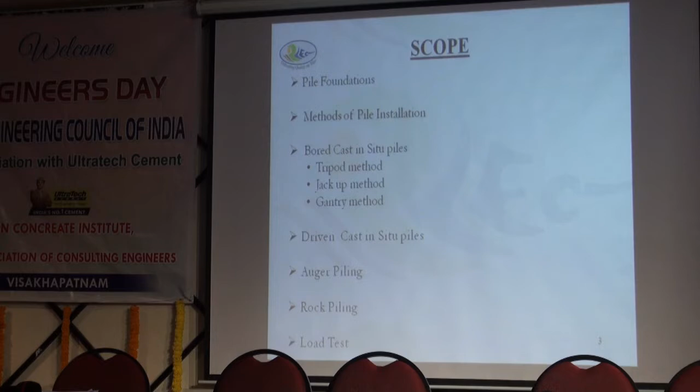So we have to test whether this pile foundation, whatever has been given for the load, it is taking the load or not. These piles are to be tested. In early days, up to 2005, we used to test piles only up to 500 tons, but today we are testing piles up to 4000 to 5000 tons on each pile. So the technology has also gone much ahead, and there are scientific methods of doing this. So I'll quickly go through the pile foundations, whatever are there, the testing whatever has been done, and then I'll explain two projects which are very critical and how we executed those two projects.

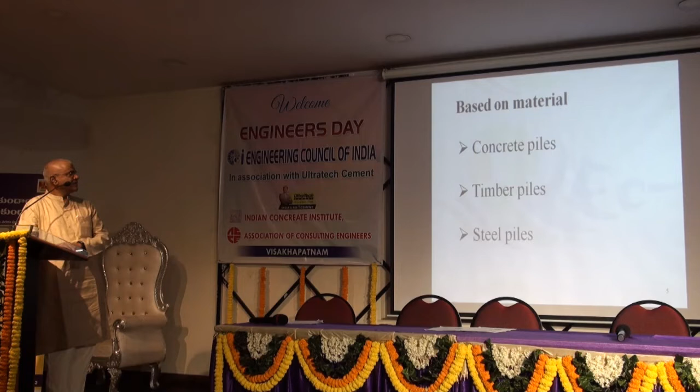We'll give you a presentation on that. The first classification is based on installation method: cast in situ, bored cast in situ, driven cast in situ piles, then driven precast piles, bored precast piles. Based on the materials, we have concrete piles, timber piles, steel piles. Of course, now timber piles have gone out because of environmental issues. Mostly left out are concrete piles and steel piles.

Bored cast in situ piles - these are the activities that are generally done in bored cast in situ piles. First, being a marine structure, we have got to do the piles in the sea. So a liner with MS plate is required, which is done in the first stage. The driving of the liner is done up to the hard layer.

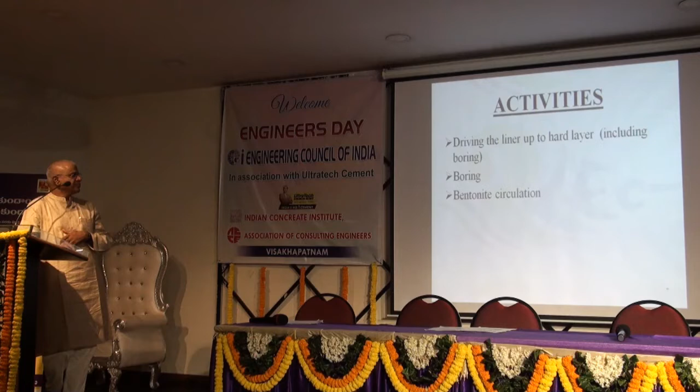The boring is done with different methods, which we will explain. To retain the soil around the pile foundation during boring, we use a bentonite solution which holds the soil and prevents it from collapsing. Then comes reinforcement cage lowering, Tremie concreting, and load testing. These are the activities generally taken up in these works.

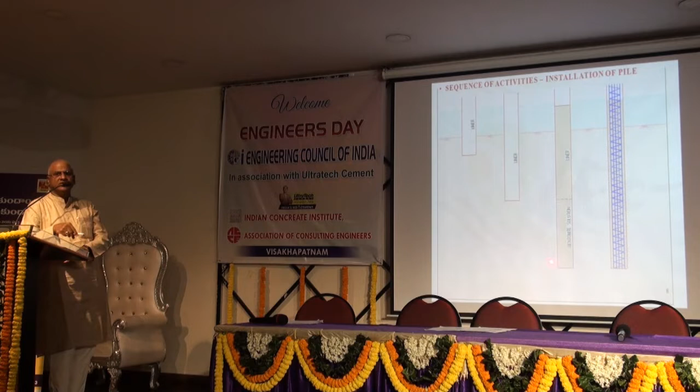The first thing you see is the liner, an MS sheet liner which is driven up to the hard strata. You keep boring and drive the liner till the bottom. The liner is taken up to the hard layer wherever it reaches a refusal point, and from there you continue boring till the foundation level as per the design. Once this is over, you lower the reinforcement cage into the bore.

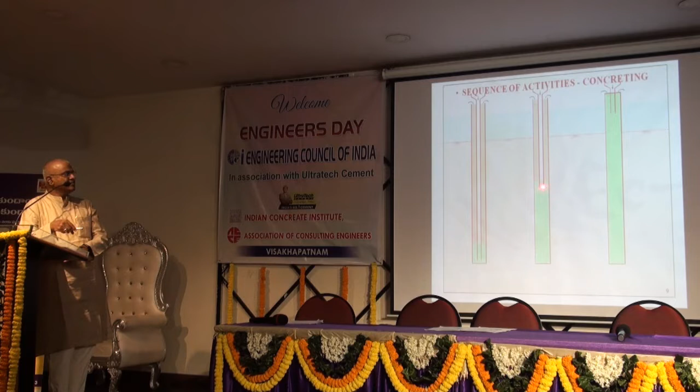Next, we lower a Tremie pipe because the bore is all filled up with water, so you can't mix concrete with water. Hence you put a Tremie pipe till the bottom of the pile, and then the concrete is poured. As the concrete is poured, the pipe is lifted up, but it is ensured that the pipe never comes out of the concrete, so that the concrete and water do not mix. This completes the concreting, and this is the complete set of piling.

Next, methods of boring. There are different types of methods of boring depending upon the soil conditions, and the engineer has to select which type of boring is required. One is bailer and chisel. I'll explain with photographs so that you'll be able to understand easily.

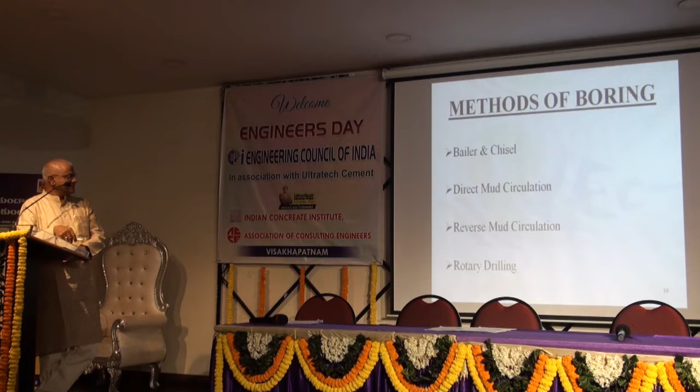There is a direct mud circulation method and a reverse mud circulation method. In direct mud circulation, you start pouring the liquid from the top. In reverse mud circulation, you take the liquid to the bottom of the pile and then lift up the mud. Then there is rotary drilling, which is the latest technology being used now.

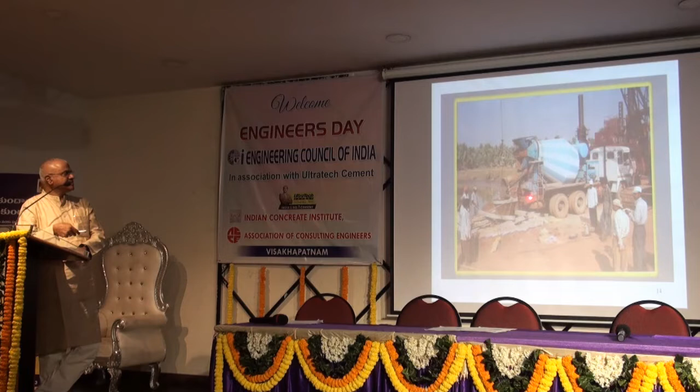Different methodologies of piling. As I said, there are different types depending on site conditions and locations, so we have to use different methods of piling. One is using the tripod method, second is the jack-up platform, and third is the gantry platform.

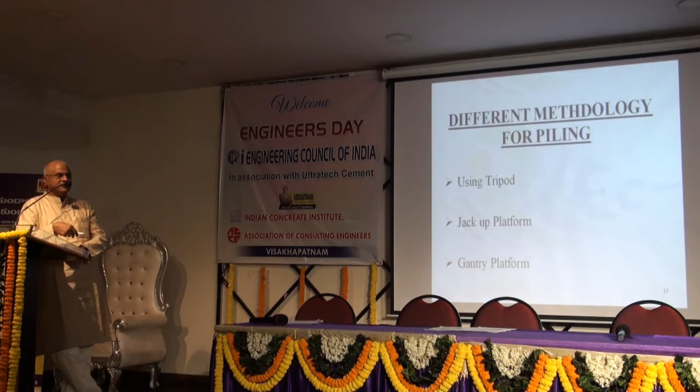This is the tripod which stands on three legs, that's why it is called a tripod. The pile will be at the center. You keep boring, chiseling, and doing filling wherever needed, and then do the job. This is the same type shown again.

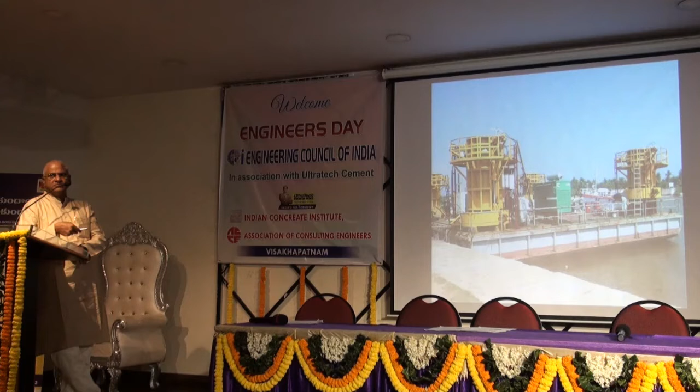Next is the jack-up barge, which has four legs. Suppose you want to do piling somewhere in the middle of the sea, it can go up to 45 to 50 meters depth, and you can arrange a stable platform there to do the piling. This is a hydraulic rig established on the jack-up barge for piling. The jack-up barge stands stable, and even normal rigs can be put up on it to do the work.

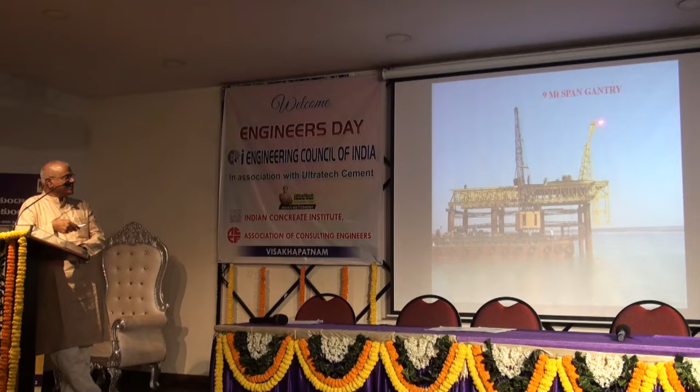The next method is the gantry method. You erect temporary piles, erect a gantry, and over the gantry you erect the booms. Along with the booms you start driving the piles. This is how the pile is done. A platform is completely made up, then supports or guide pins are arranged along it. The pile is driven, and it keeps moving forward on wheels, which I will show in the next slides.

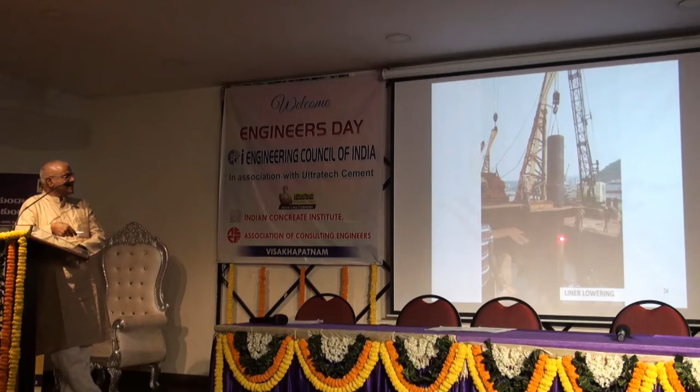This is how the bailer and chisel boring happens. The liner is being pitched into the ground level, and then you keep boring. This shows the liner being lowered.

It is important to see that the bottom of the pile does not have any soil content or waste pieces, and we also flush the pile once the boring is completed. We flush with either fresh bentonite or fresh water.

If the liner is up to the bottom and there is no collapse of the soil, we generally use a compressor and just do it with fresh water, which is done here like this.

In normal DMC piling, we do it with fresh bentonite and check the properties, that whatever flows out should have 1.1 density. This will be checked, and accordingly the pile will be passed.

Concreting of the pile is generally done with a concrete pump from which you pump it up and do the concreting, as explained earlier. These are the different temporary bridges that would be built to construct the main structure at locations where you don't have the protection of the sea.

Generally all the ports are covered with breakwaters to see that you don't have that much swell. But where you don't have that opportunity, you have got to build temporary bridges like this and then move forward.

This is the piling we generally do in the seas. These are the wheels which we use for movement of the gantries from one pile location to another when we shift.

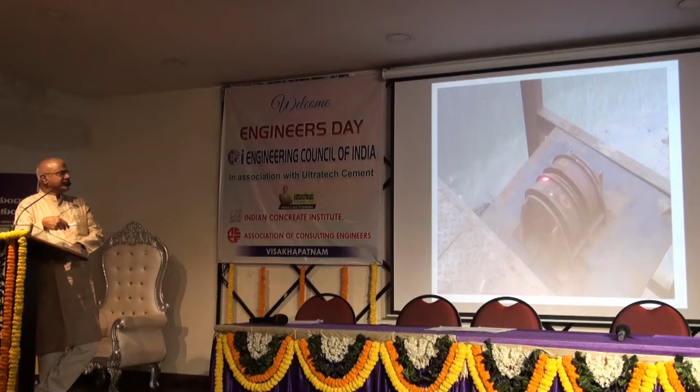These are the wheels that we put up, and these gantries move on around 6 wheels completely to the front. So this is the shifting arrangement for the wheels.

Once the gantry's first location of piles is completed, the gantry is to be shifted to the next. So this is the shifting arrangement that we use for the gantries.

This is how the work moves forward in the sea, where there is no protection of the sea waters with respect to breakwaters. In these unprotected areas, we have to be very careful in such types of works. So how we keep carrying it out, we will show you in the next picture.

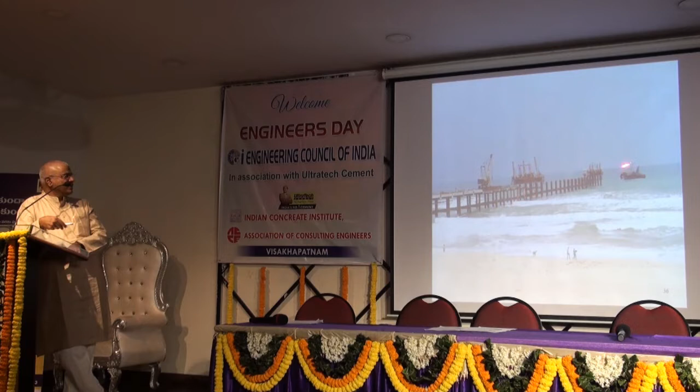How we have gone forward, I will show you in the next 2-3 slides. So this is how the piles are done over here.

This is how we make a platform at the bottom, and this is where the people keep moving forward, take the material and other things through this platform, walkway, whatever is there, this will be carried out and moved forward.

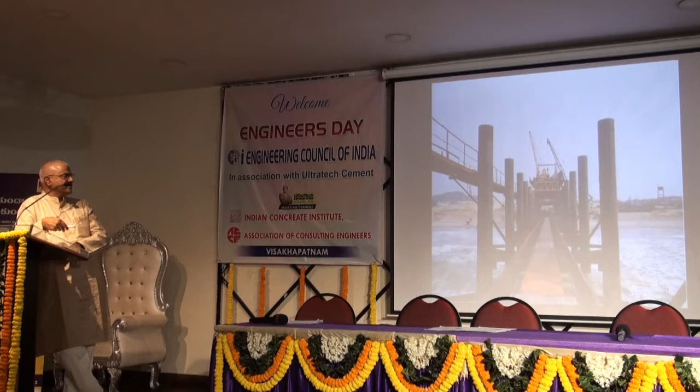This is how it moves forward. Sometimes we have got to do the piling not only with the bailer method, but with the DMC method also at some locations. So we put up the tanks over here only and then keep moving forward.

This is how the platform looks.

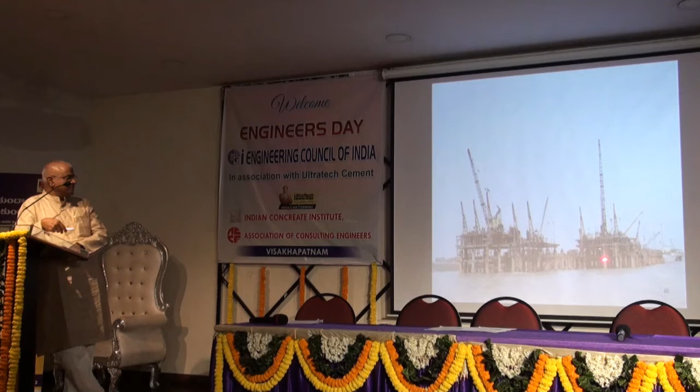These are the gantries that are being erected at some of our sites, which I will show you in one of the sites what we have done. Similar arrangement here.

After these hydraulic machines came up, due to the scarcity of labor, we have started designing the gantries also to support these hydraulic machines, which weigh around 90 to 100 tons. So we have started designing and doing this so that the work can progress faster.

This is a reverse mud circulation machine, wherein generally we use these machines for diaphragm walls. If the land is to be protected from erosion to the sea, we have got to do diaphragm walls, and the diaphragm walls are done with these rigs. We used to do it earlier with these rigs.

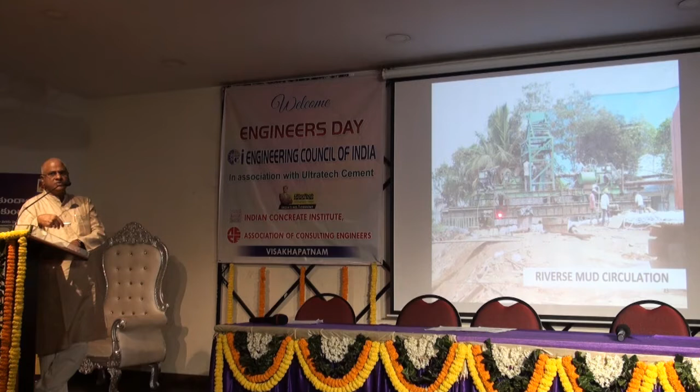Now the latest hydraulic machines have also come up with grabs, and we are doing it with those. But if you are to go into the rock, these machines are still the best rigs available today, proven to be the best, though the work is slow.

Driven cast-in-situ piles are often not used much now. Auger piling is also used only at shallow depth piles wherever required.

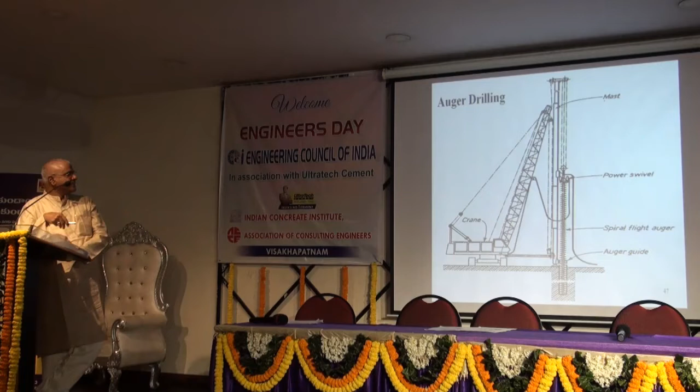So these are the methods - this is called continuous flight auger, and it takes the soil completely from bottom to top at a time.

Rock piling - as I said, we are going with testing of piles up to 4,000 tons. So the piles are to be taken into very hard rock, and even up to 10 to 15 meters depth in the rock has to be bored.

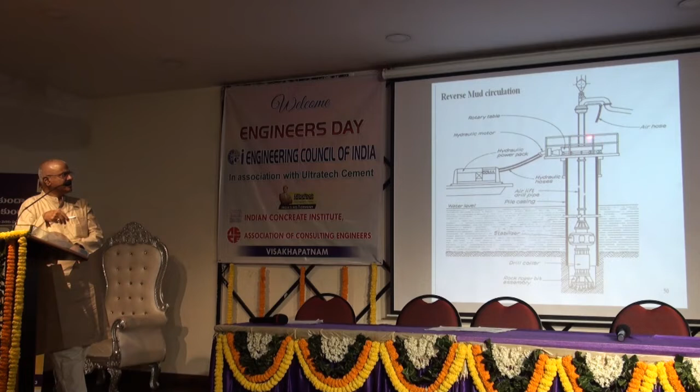So now a special type of equipment has come up recently, and this equipment can drill into the rock up to 10 meters, 20 meters, and even diameters up to 2.5 meters we are able to do with this type of equipment, which costs nothing less than 20 crores.

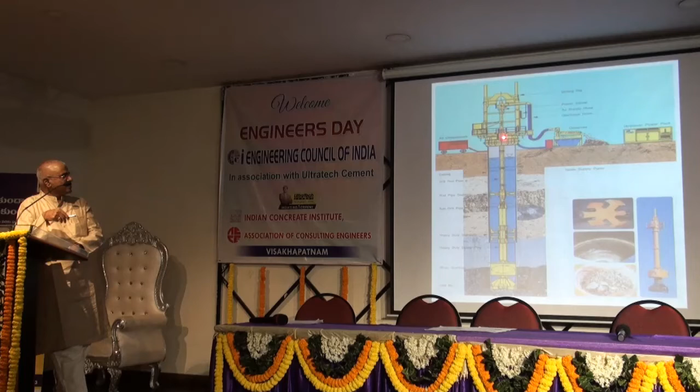This is the machine we use over there, and this is the chisel used for it. This is how the total setup is done for this machine, and then it keeps boring. These are the tools we have, completely fitted with rock bullets, diamond bits specifically, which can keep boring into the rock. These are the different types, different diameters.

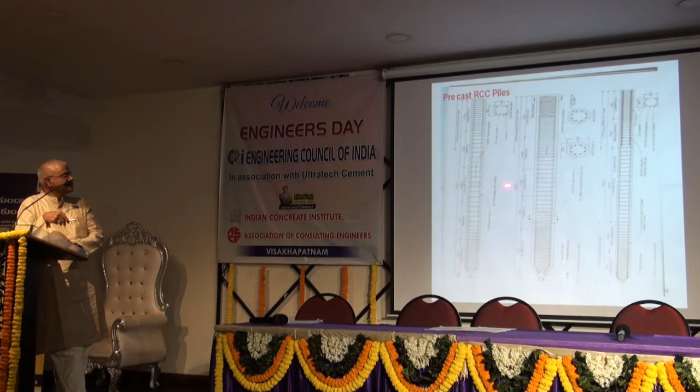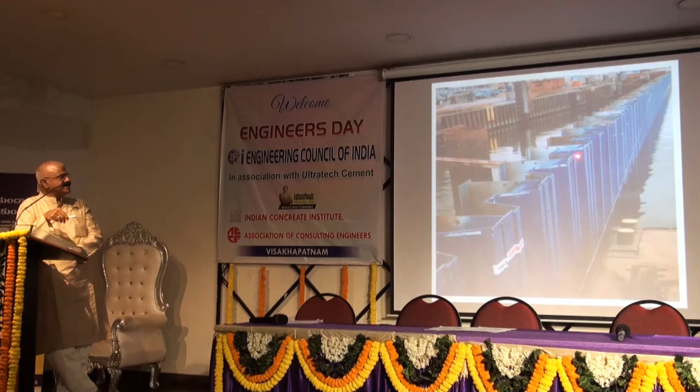This is sheet piling work, wherein a vibro hammer is used to drive the sheet piles to protect the land without erosion into the sea, and sometimes to stop water for certain works. So these sheet piles are used, and a vibro hammer is used for such things. These are more equipment that we generally use in marine works. This is driving of sheet piles. In some locations we also use these sheet piles directly to build the jetty, but in some locations we use them only for retaining the soil and other things.

These are sheet piles that we have done in some of our projects at Kakinada and Visakhapatnam. Next, load testing of piles.

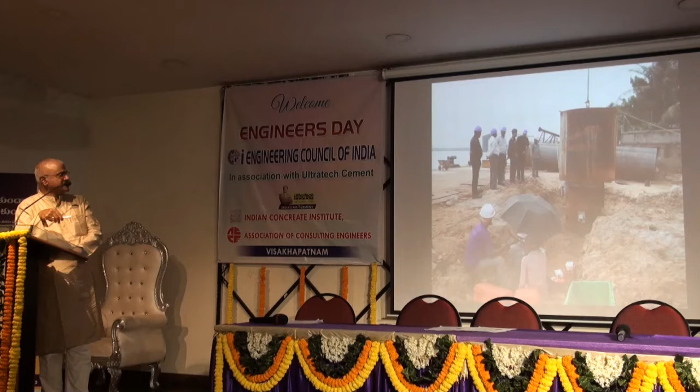This is very interesting - this is a dynamic load test which has come recently. It has not been approved by IS standards in India, but British standards approve this system, and we are going ahead with this dynamic load test, which we can finish very fast without much cost. The cost is also very less. This is how things are observed while the dynamic load test is conducted.

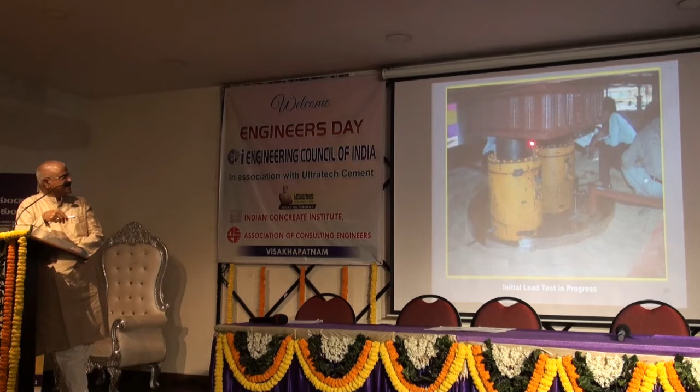This is a pile we have done for about 2,000 tons load test. The pile is located at the center. We have 4 anchor piles driven all around it, fixed to these ends, and the load is taken from these anchors, which gives you up to around 2,000 tons. These are the jacks arranged for load testing to give the load.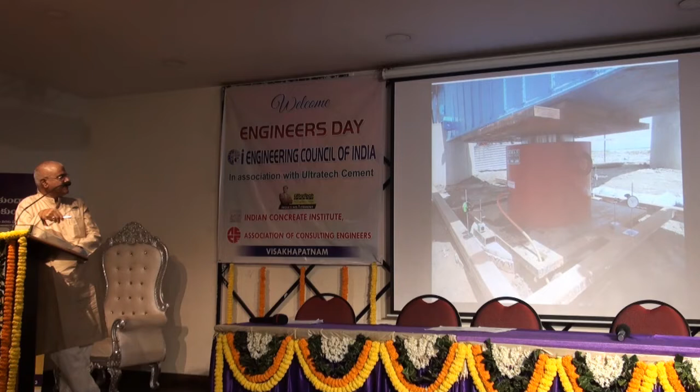This is the final arrangement. After completing all the arrangements, this is the test which has been done for 4,000 tons. This is the jack which was used for that 4,000 ton test.

These are the methods that we generally use for our rigs and for our marine works, mostly for all the marine works.

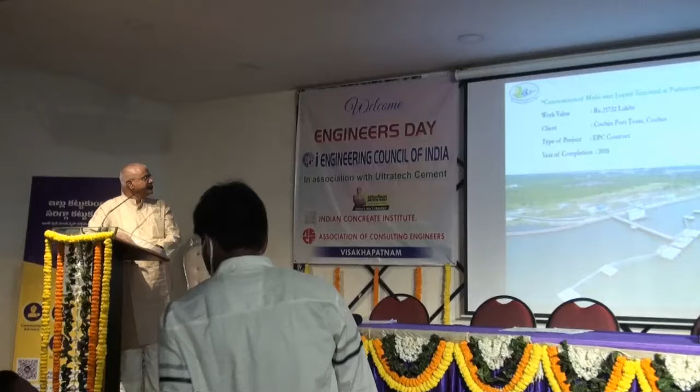Now I'll give you a presentation on two projects. One is a marine project and another is a seawater intake project, which we have done on our own. This project was done for Cochin Port Trust, costing about 217 crores, and it was done on an EPC basis. Our engineers designed this project on their own and executed it.

This consists of, from the previous slide, an oil berth actually, which has breasting dolphins, 4 numbers, mooring dolphins, a central platform, and an approach trestle, and there is a pump house. In oil berths, safety is more important, so to ensure safety, a fire pump house is built so that water can be used if there is any fire, hence the fire pump house is there.

There is also a barge berth which has been constructed, and a sea protection wall done throughout for about 1.5 kilometers. This area has been completely filled up by us - land was acquired, filled up and brought up, and this construction has been done.

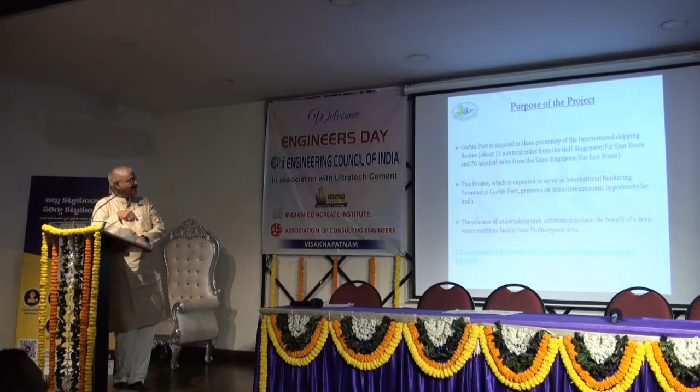I'll show you how this project was envisaged and carried through. The purpose of this project is that Cochin Port is situated in close proximity to international shipping routes - about 11 nautical miles from the Gulf-Singapore or Far East route, and 76 nautical miles from the Suez-Singapore or Far East route. This project is expected to serve as an international bunkering terminal at Cochin Port Trust, presenting an attractive economic opportunity for India. The sole aim is to have the benefit of a deep water marine facility near Puthuvypeen.

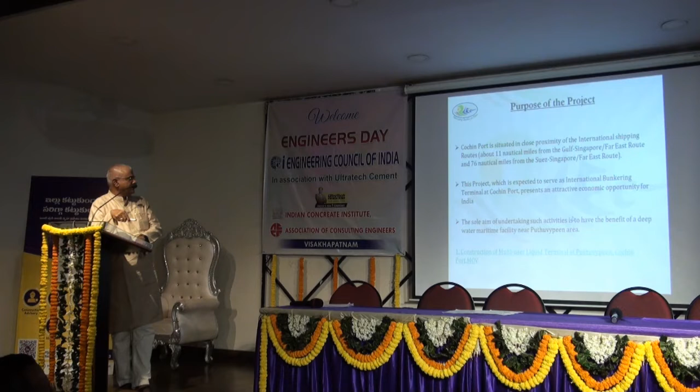There is nothing, all this is completely empty when we were at the site. So it has been filled up, a seawall has been done, filled up, and then the work has been executed.

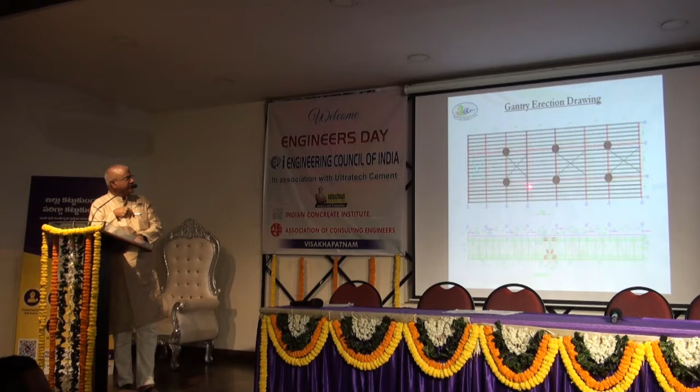Initially, to start with such works, we start with gantry fabrication. The drawing will get approved, and then accordingly the gantry fabrication is done. Then the construction methodology, whatever we have, the components I have already told you earlier.

So the approach trestle we just started from over here. As I said, all of this area has to be filled up, so we had to drive all these as temporary piles, and the permanent work started from somewhere over here, about 70 meters from the land, and then the approach trestle moved from here further. This is the approach trestle up to the end.

This is a mooring at the breasting dolphin. We had launched one jack-up barge as well as one gantry. We have used both systems, gantry as well as jack-up barge, depending on the work, time, and place.

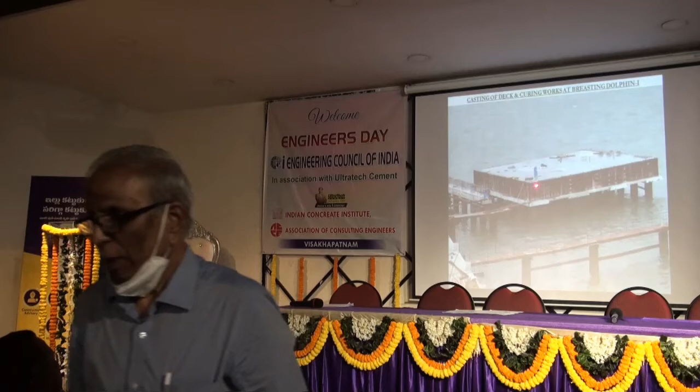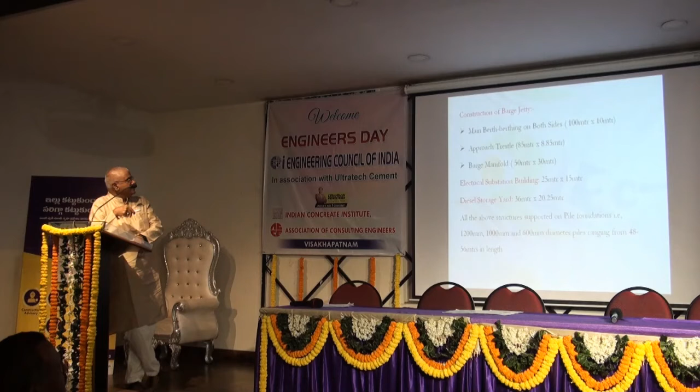The barge berth is a similar system, but it is a very small one. These are other civil works required for the project, like the pumping station, pigging points, and other things. These are the civil works being done for that.

Similarly, this is the completed one.

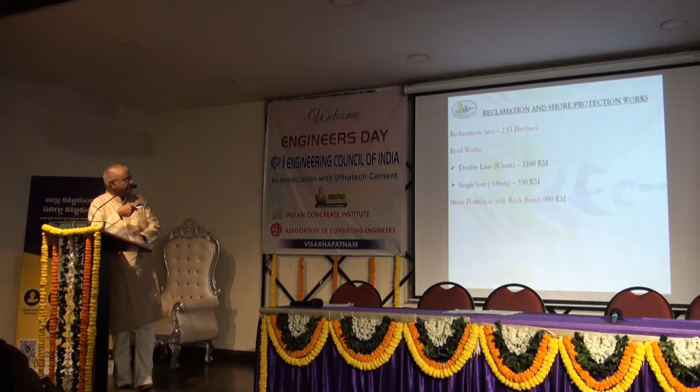This is the final completion, of course, which you have already seen.

This is a firefighting system. If any fire occurs, a layer of fire protection is between the ship and the berth. The ship generally stays over here and the berth is over here, so it is faced between both the things, in case any fire occurs between the ship and the jetty.

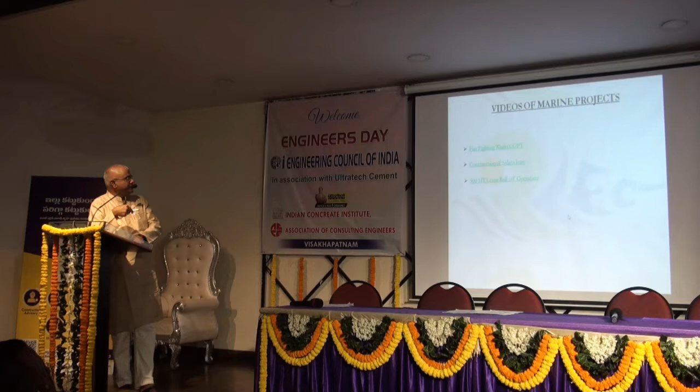You can see the firefighting system here. This is how it covers even the ship also. If any problem occurs, it covers the ship as well as the jetty, and everything is barricaded once any fire accident or anything occurs. This whole design and execution, including mechanical and electrical works, has been done by us completely, sir.

So this is one of the works I have shown you, which is a marine work. If you want me to continue with the other project, I will continue. But otherwise, if anybody has any doubts on this structure, let's clarify before moving on, because the other project is a different marine structure which I will be showing. So if anybody has any doubts, questions or answers, we can address them now, or if you want me to move on to the next project, I'll move on.

Question: What kind of firefighting do you require there, and where would you need firefighting in such structures? Where does the fire occur? Answer: We have done the complete firefighting system equipment. Question: Sir, where does a fire occur, and how does it happen? Answer: Generally it's an accident, you don't know how a fire accident happens, it's a general accident, not due to the equipment. It could be any accident, any misuse of anything, and the system is in place for that.

Question: What type of ground improvement technique was taken? Sir, I couldn't get it. What type of ground improvement techniques have been taken in reclaiming the land, because a lot of civil engineering structures come onto that land?

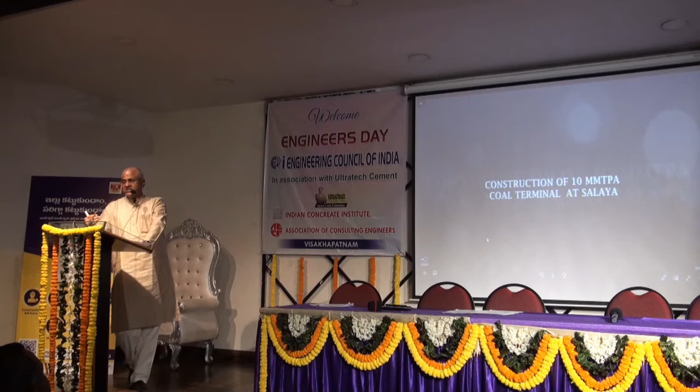This project we did in the sea, about 12 kilometers from the land. So logistics planning, high tide, low tide - this project is in Gujarat, and the variation between high tide and low tide is 6 to 8 meters. The logistic planning is very important because the timing of high tide and low tide keeps changing. Generally if you want to go for work at 8 o'clock, you find a low tide and your boat will not go. So there were a lot of problems we faced, but by God's grace and with the help of Essar, we could complete this job on time.

Not only did we complete this job on time, but seeing the success of this job, they gave us 3 more jobs, which I will show you how technically we have done, and how we put in all our efforts for that.

So just a gist of the project - I don't want to waste much time on this, because you've seen all this work earlier. Just a small video - I will show you how it has been done.

This is a coal jetty for Essar at Salaya in Gujarat. This is the project which we did in the sea, about 12 kilometers away. So everything - manpower, water, everything - had to be transported by boats only.

This is how the jetty is being constructed with the help of barges. We erected the gantries also, with the gantry piles going on over here. From the back side, you can see the works also being completed. For completion of the work, we had erected additional gantries from the other side also.

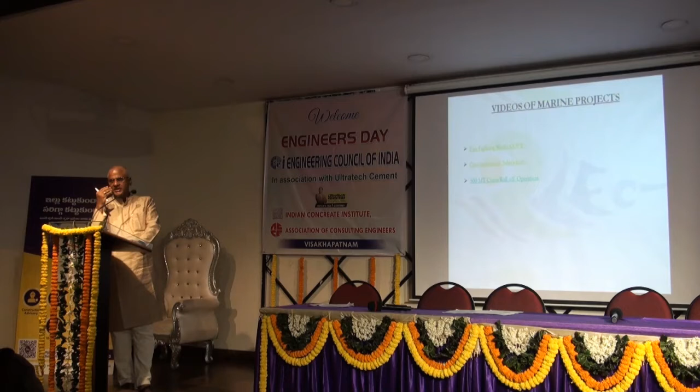Sir, at that time, Reliance didn't want to waste their money just like that. So how do we move ahead? Because a crane of around 500 tons had to be installed on this jetty, they thought they would finish off the approach so that through the approach they could take the crane and put it over here. But that didn't happen. So their project manager, Mr. Joshi, was there, and we were there - we were given the task to take a 500-ton crane and put it over the jetty.

So that video I will show you - how we planned this, how to take the 500-ton crane over the waters, put it there, erect it, and then hand it over to them. It was planned and we successfully completed it within 3 months.

The proper suitable barge was selected for this. A frame was made - this is the frame which has been made over here, for the height difference for the crane to roll onto the barge. It has been placed on the barge.

Once it is placed on the barge, the crane, which had been dismantled into parts, was erected on that one. First the crane track was dismantled and tracks were put up, then the crane was put up over that.

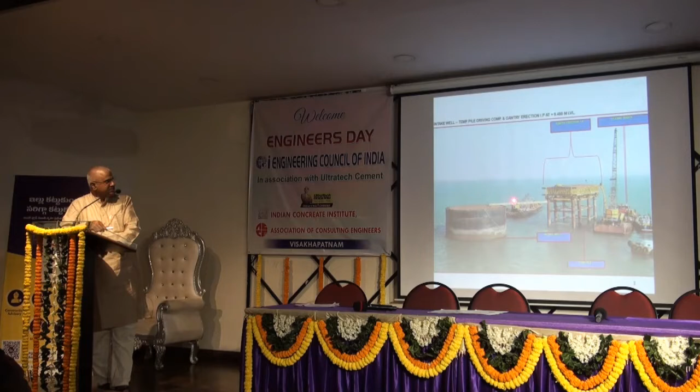Yeah, next. This is a well which has to be constructed, 22 meters diameter and about 17 meters depth into the water, and this shell has to be transported right from the same place, 12 kilometers it has to be transported. It's the caisson technique we utilized over here, and how we utilized it is explained in the next slides, so I'll leave that explanation and move forward.

The tonnage and how many days were planned has also been put over here, 45 days for manufacturing the bottom shell. Then the timelines are put up over here.

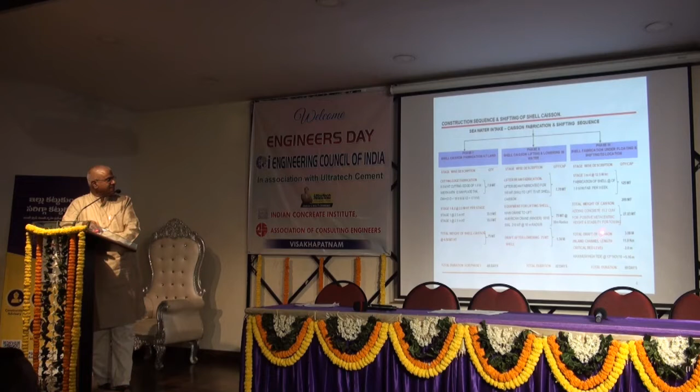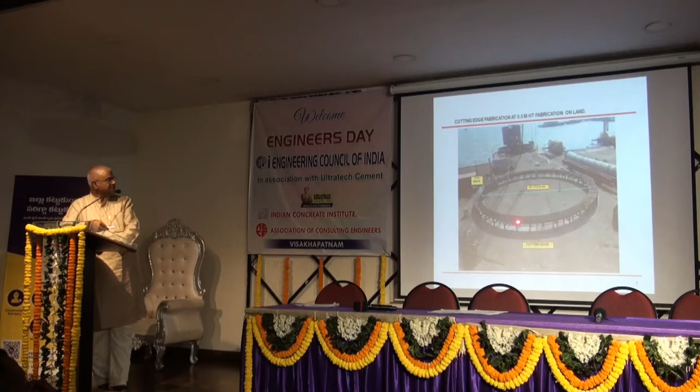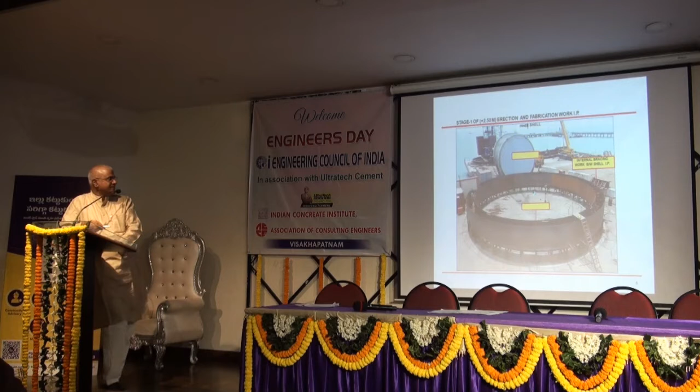Next, this is a shell we put out like any well. Most of you must have seen well sinking where you provide a cutting edge at the bottom. The cutting edge has been made over here. The shell has been calculated so that even if left in water, it just floats. About 4.5 meter shell has to be prepared with a 1.5 meter width. Complete waterproofing has been built up, and after doing that, just simply putting the shell won't work it out, so to lower the center of gravity, we laid concrete of around 30 tons at the bottom, and then took it up onto the barges and put it up. This is how the outer and inner are calculated and fabricated.

After fabrication is over, this is lifted with the help of a crane of about 250 tons with a radius of 38 meters. So it has been just lifted up and put onto the barge.

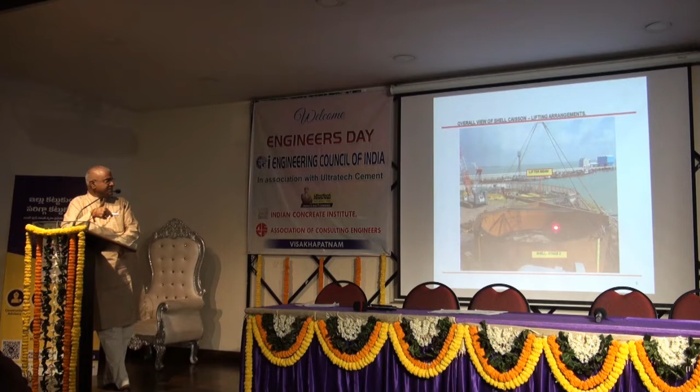Next, these are the two barges which have been joined together. One barge is this, one barge is this. These are tied up with tie beams, and then in between the center we had lowered the well.

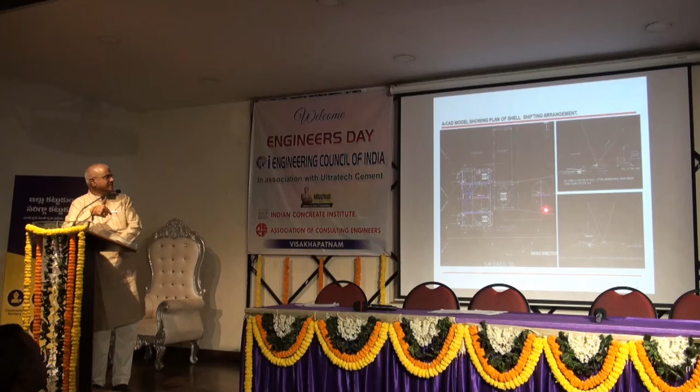This is how in AutoCAD we had made all the drawings ready so that you don't make any mistake on any of those issues. This is how it has been lowered onto this, in between the barge, whatever gaps I have shown you.

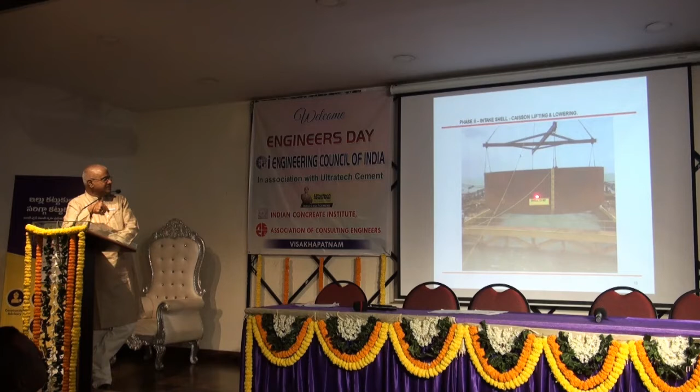After this has been set up over here, it has been totally laced so that it doesn't move this side nor that side. And then as per the calculation, whatever is there, it has been planned out.

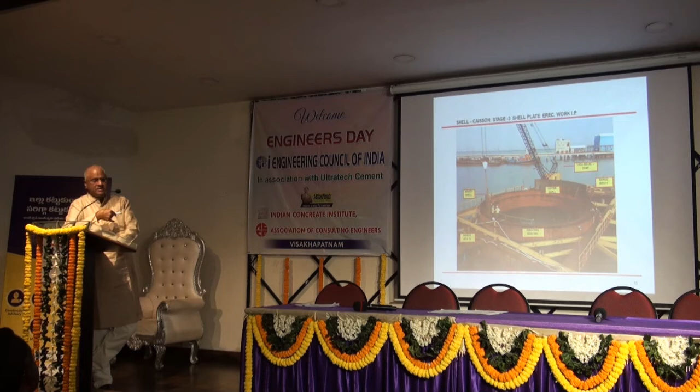After this, we had to build up some more height of the shell, because as it keeps traveling, we thought some more height is required, so we fabricated it over here, since more than 75 tons we don't have a crane capacity to lift at a radius of 38 meters. So the additional height of up to 12.5 meters, we manufactured the outer shell and inner shell at this location only. This is how the shells have been put up.

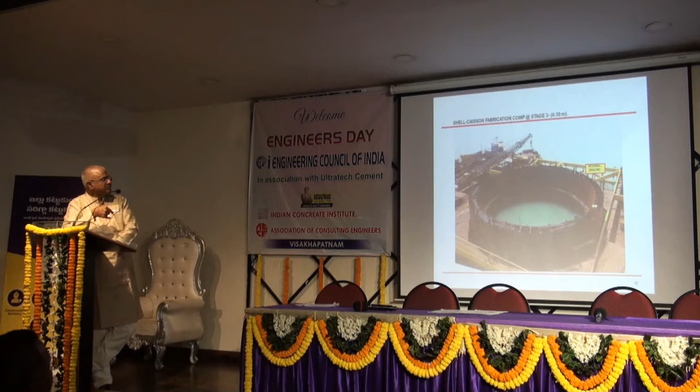12.5 meters is the last stage that we have done. The complete welding, everything has been done, including the supports and all.

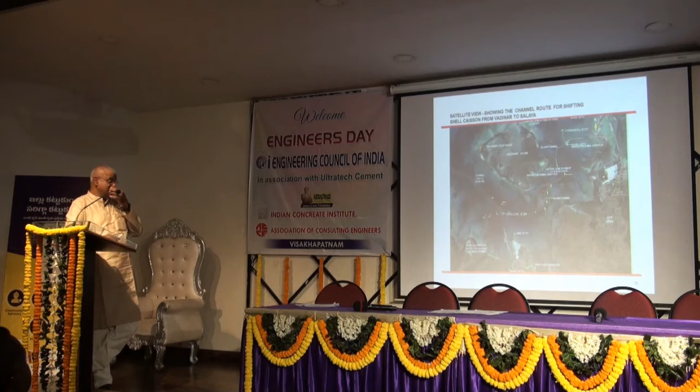Now again the same route you can see over here. The earlier one we are taking in a barge wherein we require a draft of only 1 meter, whereas this requires a draft of around 4.5 meters.

So we were facing a lot of difficulties, so we were just waiting for the highest tide to happen. All the calculations were done on how to travel over here. Even the bathymetric survey of the complete 12 kilometers area has been done, routing how it has to be done.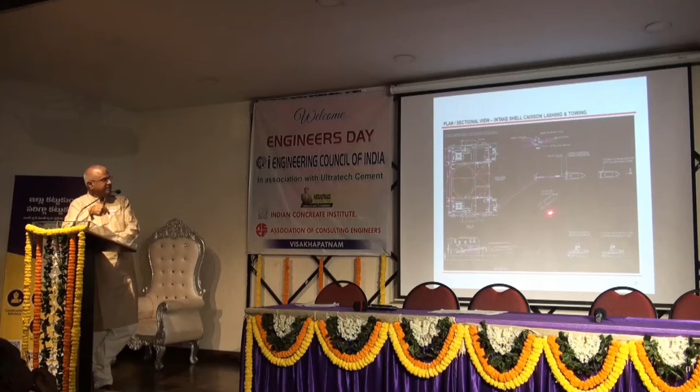There are two tugs which have been deployed for this, with an additional tug on spare on this side and spare on this side, because if anything happens in between, it has to be taken out immediately and moved out, otherwise the whole thing gets spoiled. So this is the plan, and this is the elevation, showing how it is being moved.

So you can see the whole system over here. This is how it is being traveled from that location.

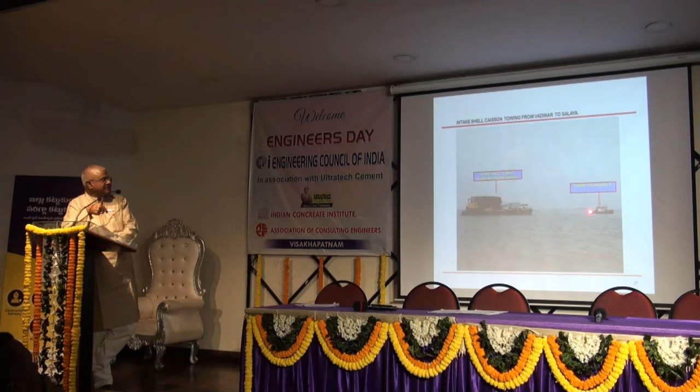This is in the night time. As I said, we got it around night 12:30. We were supposed to start and reach that location by around morning 6:30 or 7. So this is how it has been traveled.

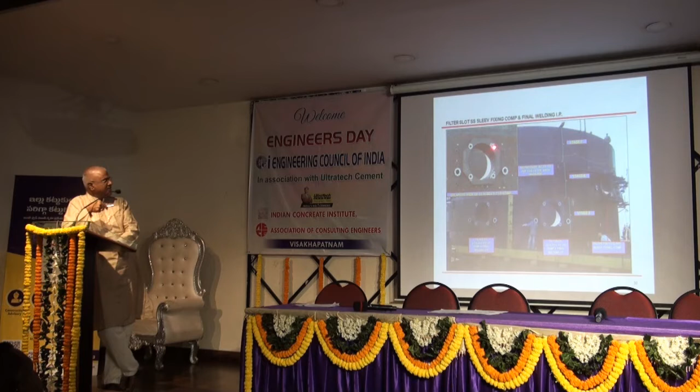Once it reached the location, the seawater pipeline required some outlet pipes and other things. So they have been constructed at that location, and then they have been put over here.

So the total depth is over here. Now, after taking this into the location, next slide.

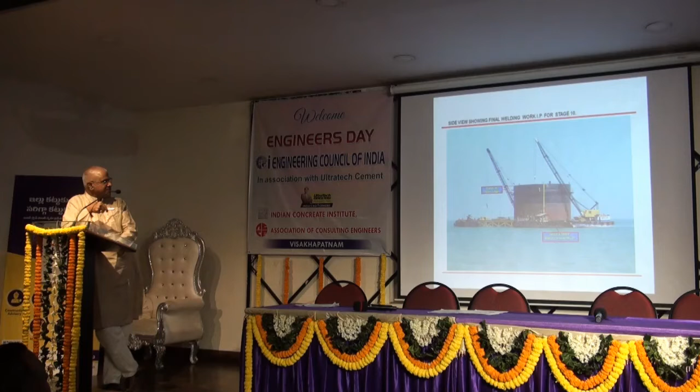These are the stages of how it has been done, because once it goes into that location, that area has to be dredged and made level so that the well doesn't tilt or shift. Accordingly, the whole of the bottom has been dredged to the depth required, and the bottom has been leveled up with metal, and then kept ready.

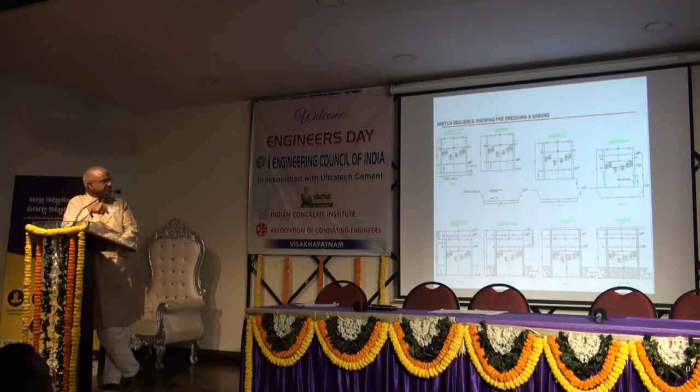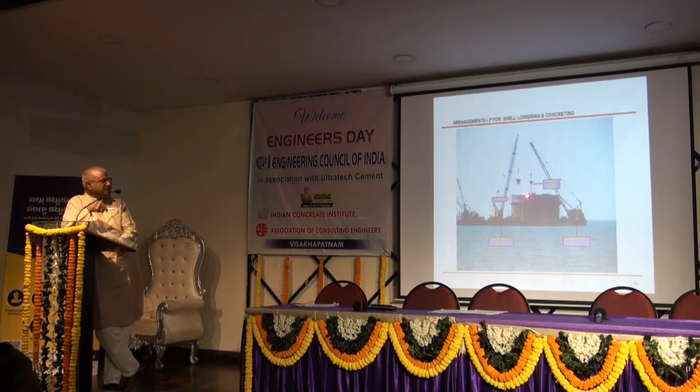Once the whole system is put in place, you find the concrete being filled up with two cranes around the system, filling it equally on all four sides so that it doesn't tilt or shift. You can find a little bit of shift here.

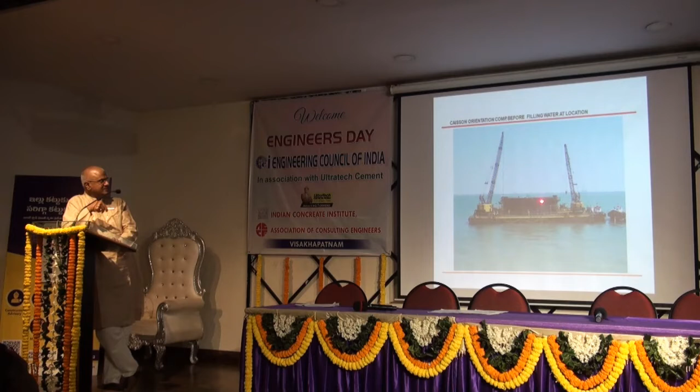It has been corrected by putting concrete on the other side and leveling it up. Slowly it has been seen that it went down to the bottom. Then additional cells are added up to 17 meters depth, whatever is required. Once it goes down, additional cells were kept adding up, and then again the concrete was started filling it up.

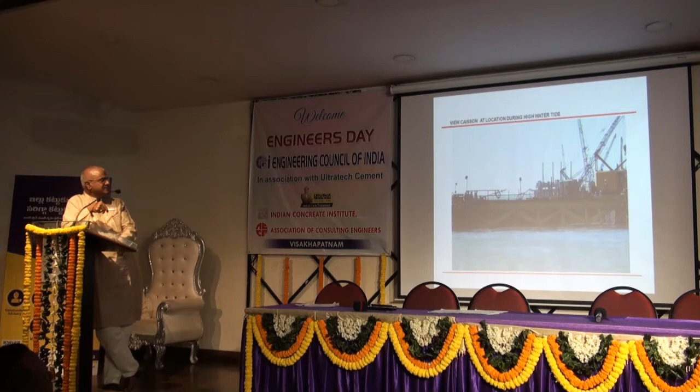The frame has been done with a steel structure. You can see the frames that have been done with the steel structure, and over this is a structure developed with structural items only, and then the pumps were erected accordingly.

So from here the water has been pumped out. Again, after this well has been done, from here we have to make an approach to the jetty. So the jetty has been constructed after this. You can see the jetty being connected from here to the location of our jetty, connecting our existing jetty. This is how it was there.

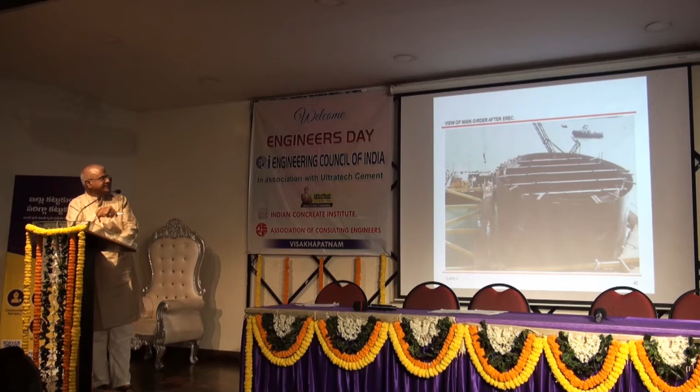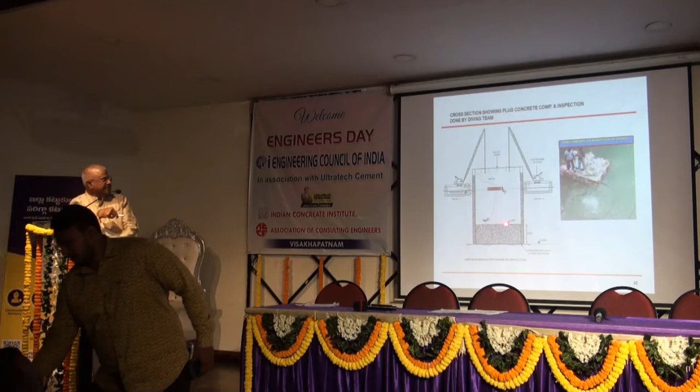This is how once the well is over, how the concreting has been done, and how underwater divers have done work. We had made this system before completion itself, with all these things. We had explained to all the engineers that this is the system we have to follow. Then only the work started.

So it was explained very well to all the people who were there, and the work has been successfully executed. Of course, not in 3 months—we took 5 months to do the job, because we had a lot of problems. After going to that location, we found there is a rock at the bottom, and we had to chip that rock and level it, otherwise the well was going to tilt. So that took more time for us.

We didn't expect that much trouble, but it took time for us, especially at one corner where rock was there. We had to chip that and then place it over here. And of course we shifted the well by about 3 or 4 meters away, but the jetty was connected to that, so there was no problem.

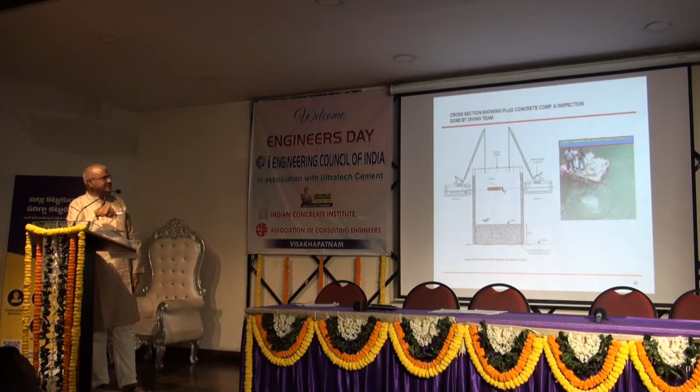These are the pump house structures and all which are being done. Yes, sir, these are the things. So any questions on this?